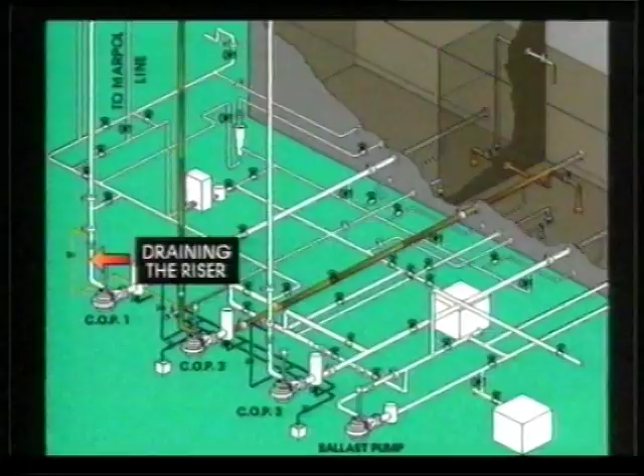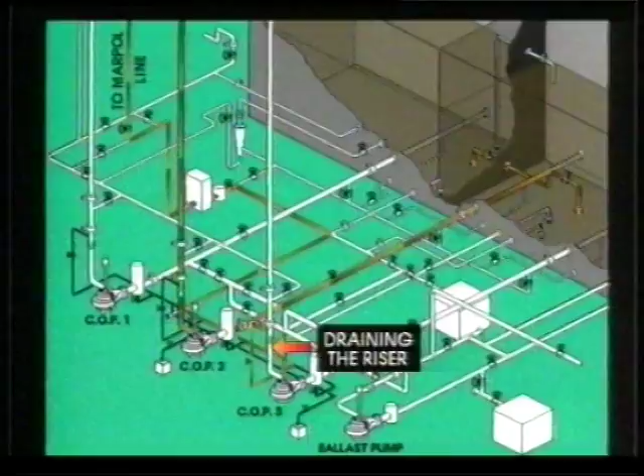On deck, the drop lines should be opened down to the main discharge. First, drain the risers above the non-return valves. Then strip the main cargo lines not in use. To be able to empty the lines completely, remember to let inert gas into the lines to avoid vacuum.

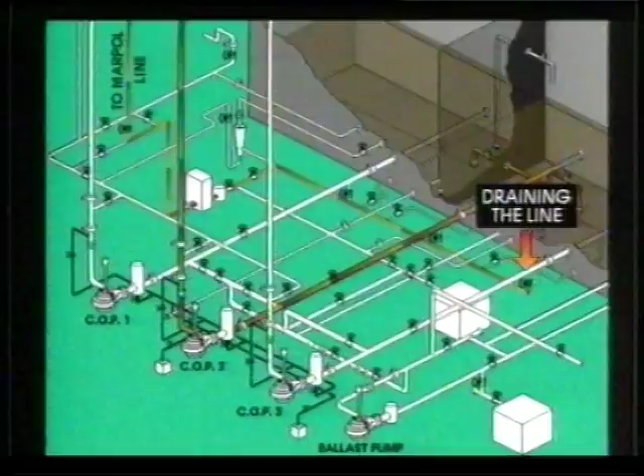Next, strip the cargo pumps. The last operation will be to strip the slop tanks with the stripping pump. Strip cargo pump number 2 and its lines the same way you did with the others.

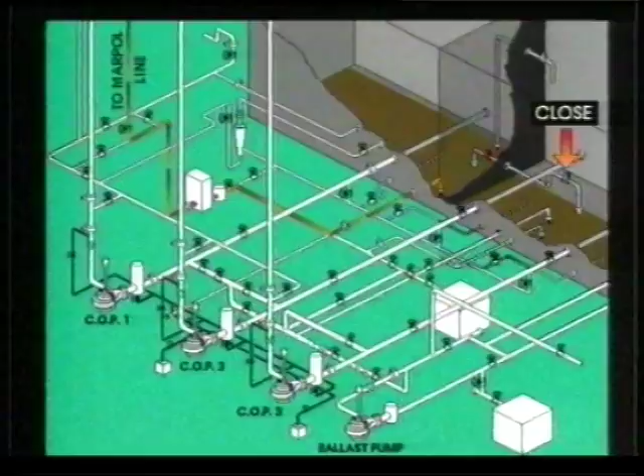All cargo is discharged, and the cargo tanks are being inspected. Should there be a discussion claiming that the vessel is not properly discharged and well drained, you should offer to start the pumps to prove the opposite. It is a safe routine not to allow disconnection of the loading arms until the tanks are inspected and found to be empty and well drained.

Let's conclude this program by showing an operation you may be required to perform, that is, taking on ballast using the cargo pumps.

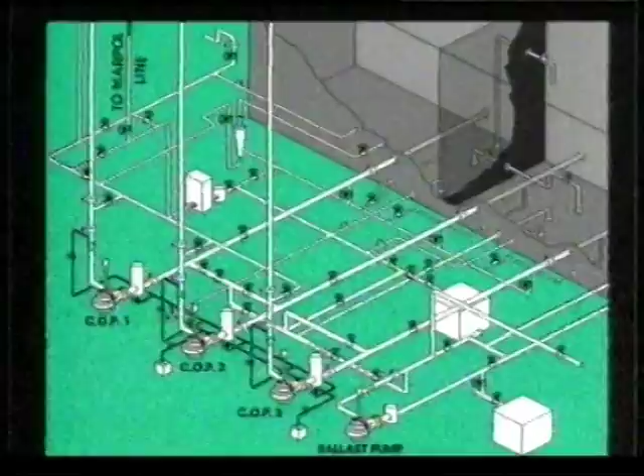As our vessel has segregated tanks, the ballast system is separate from the cargo system, so using the cargo pumps would only arise in an emergency. But in a ship with no segregated ballast, you always have to be able to take in ballast with the cargo pumps. This operation is risky.

Cargo leaks causing pollution can occur. There is a risk of pollution, and so you have to be extremely careful to prevent oil from leaking to the sea when ballast and cargo systems are connected to each other.

To prevent oil spills, you must use a special start-up technique. You must create and secure at all times a lower pressure in your vessel's piping system compared to the pressure at the sea chest, so water flows to the pump as soon as the last sea valve is opened.

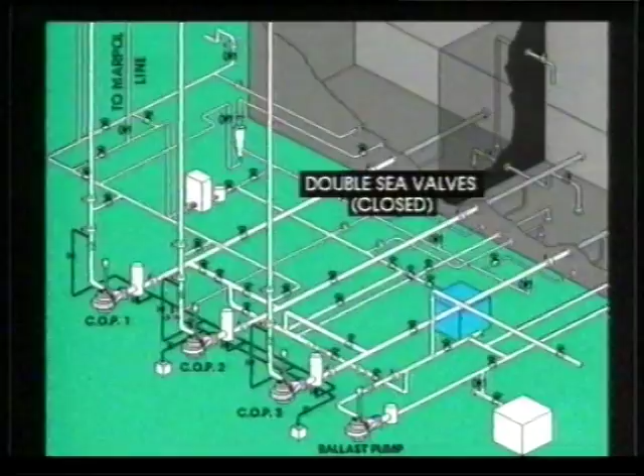There are 2 sea valves, both manually operated gate valves. These 2 valves have been pressure tested before arrival as part of the normal routine. You know they are tight.

Here you're going to ballast cargo tank number 4 with cargo pump number 1. When you start the pump, you have to be a bit brutal.

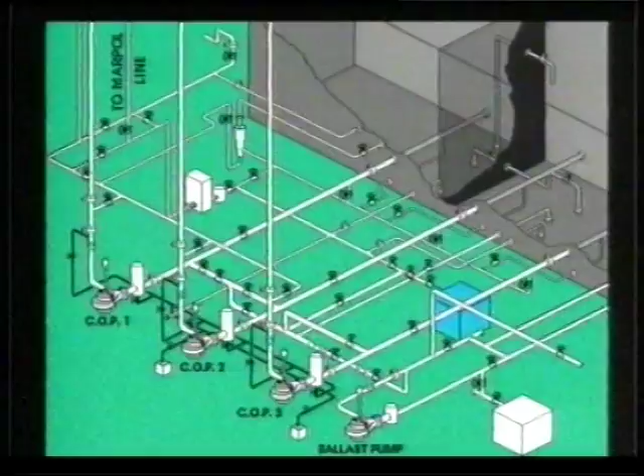As you know, we don't normally start a pump with valves closed at the suction side. But this is what you have to do when ballasting with a cargo pump, to be sure you get a low enough pressure in the suction line. You may even crack open the discharge valve just a little bit to ensure immediate flow through the pump.

The man operating the sea valves is instructed to open only the inner one. He should then be standing by to open the last valve at a given and agreed signal when the pump is running okay. He's also instructed not to fully open the valve at once. If the pump should trip, he must close the valve as fast as possible.

The man in the pump room is standing by, and you're now starting cargo pump number 1. Everything seems to be normal, and you're speeding up the pump. The pressure at the discharge side rises, and the pressure at the suction side drops below 0 as expected.

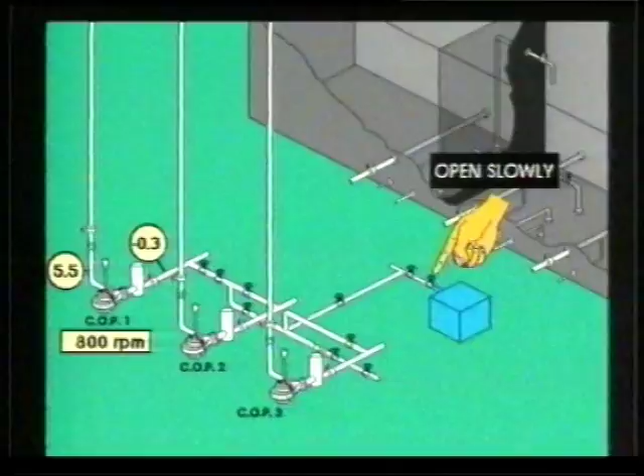Reaching 800 revolutions, the manometer at the suction side shows minus 0.3 kilograms per square centimetre, and you decide to open the sea valve. As soon as the sea valve is opened, the pressure at the pump changes immediately when the water flows through the pump.

You're now adjusting the speed and regulating the back pressure and the head by manoeuvring the discharge valve. In our vessel, the speed of the pumps will be approximately 1,000 revolutions while ballasting. There is no point running a pump at full speed if you can reach a high capacity running the pump slower. Remember, this way you will save fuel and money.

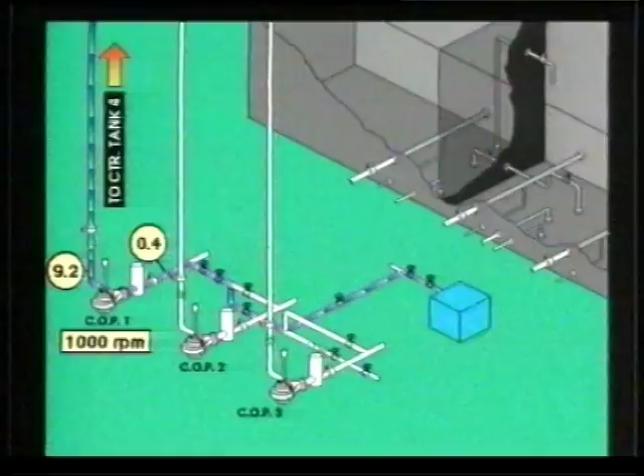In this case, you're adjusting the speed and the pressures to get a head of 86 metres. Discharge side shows 9.2 kilograms per square centimetre, and the suction side 0.4 kilograms per square centimetre. You are pumping seawater with a specific gravity of 1.025. From the HQ curves, you can see you are pumping approximately 3,700 cubic metres an hour.

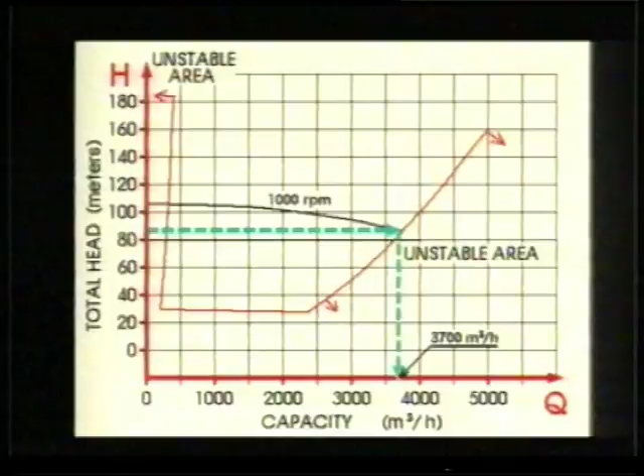Be careful to obtain a suitable head while pumping ballast. Possibly more pumps have been damaged during ballasting than during discharge. This is because it is so easy to run the pump in overcapacity with too small a back pressure and head, with the discharge valve wide open.

If you know the principles and run the pumps of your vessel with skill and care, you will save a lot of money discharging and ballasting, and you will, of course, save yourself a lot of trouble. May we wish you good pumping.

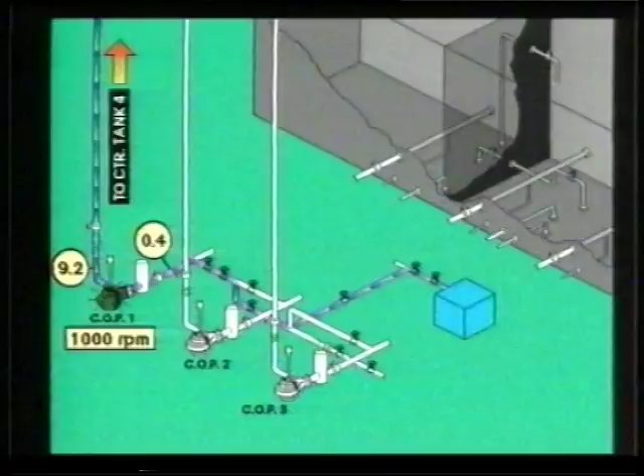The topics raised here will require some thought and discussion to ensure full understanding of the principles and how they relate to your vessel. Rerun this tape and cargo pumping number 1, if necessary, and discuss with others on board.